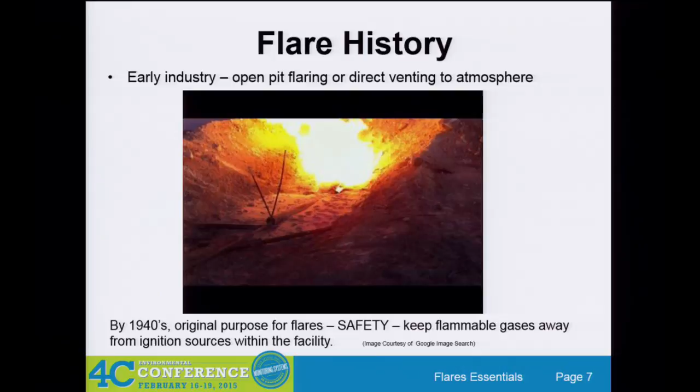These flares, while not so common in the U.S., are around the world. It's still in use today, especially on the upstream side in some other countries, this is still a practice in use today. But what would you say if you saw that? That looks like it's around today. This is a picture of a flare, a ground flare, pit flare that is in service today in the United States. So they're a little more complicated than just that pipe run into the hole, but it's something that is still here. They're very rare, but they are still around.

So the biggest thing when flares came about is they were installed as safety devices. That was their primary purpose. You have to always understand that about flares, their primary purpose is safety. And we can't say that enough, because when people start asking how much can you control this flare, you have to understand that it needs to operate over a wide window of flow conditions and compositions. It has a very unique purpose.

But the issues started changing because in the beginning, it was better to flare than to just release potentially toxic hydrocarbons out into the atmosphere unburned, so it was better to combust them. But then the world changed and everybody started routing everything to their flares because that's great, we have this gas that we don't know what to do with, let's put it to the flare and then it's controlled, so we're doing the right thing. But it's this low flow case that seems to have really started to cause a lot of the problems.

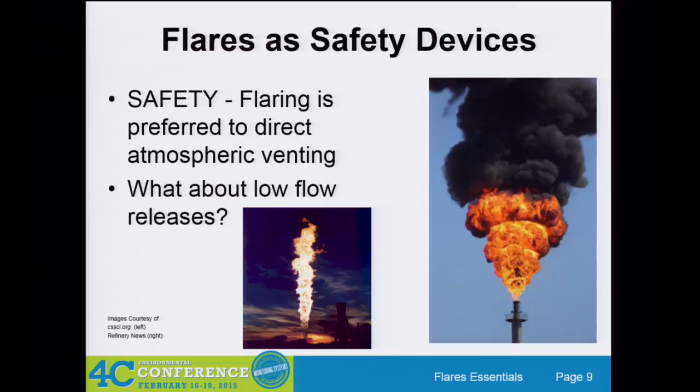So when you're thinking about flaring, the biggest thing is the flare is designed because, say you lose power at the facility, all of a sudden all your relief valves blow, boom. You've got to get rid of a huge volume at a rapid pace, because you have an upset condition, usually a high pressure, high temperature situation. You need to get that material out of the vessel, because otherwise it's going to cause problems with the vessel and potentially explosions, equipment damage.

Usually it's cheaper to vent the vessel and burn off all the contents than to cause damage to the vessel. So you definitely need a way to get that material out of there.

And getting back to the safety device, you also want to bring that combustion away from people and equipment. You always want to do this. And also the nice thing about having a nice tall flare, it also aids in dispersion, so you get an added benefit from that.

A lot of people thought about flaring, and the allegation is that everybody's flaring a ton of material. I don't see that - there are some cases where people are maybe flaring more gas than they could. But a lot of times when the flare's got a big flame on top of it every single day, it doesn't take long before everybody at the plant starts saying, that's a lot of lost energy. What is that material? Is that lost raw material, lost product? Everybody starts equating that flame with dollar signs.

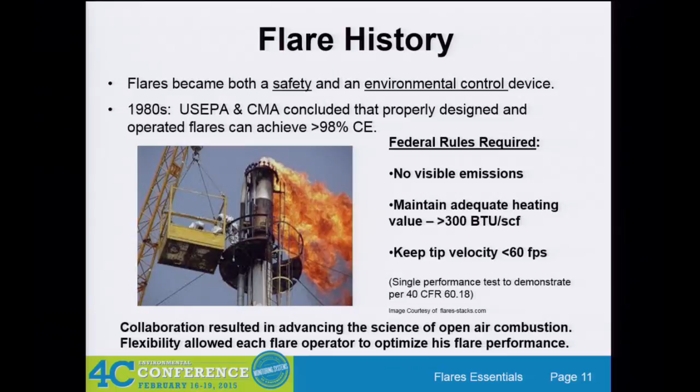You know, people say, well, they got the thermal suits on, and we're all like, well, have you seen the Jiffy Pop popcorn? You know, the old little aluminum things, and the wind shifts, and they're having a very bad day. So yeah, I don't even know where we got this. We got it from flarestacks.com, but I don't even know that facilities would do this today. The safety guys would have a nightmare.

So back, we'll show you some of the different flare studies, and we're not going to talk about all these flare studies - that would take a whole day, and we're not going to go into that level of detail. But there's just a few I want to point out a couple of different things about these studies to kind of show you where the knowledge came from.

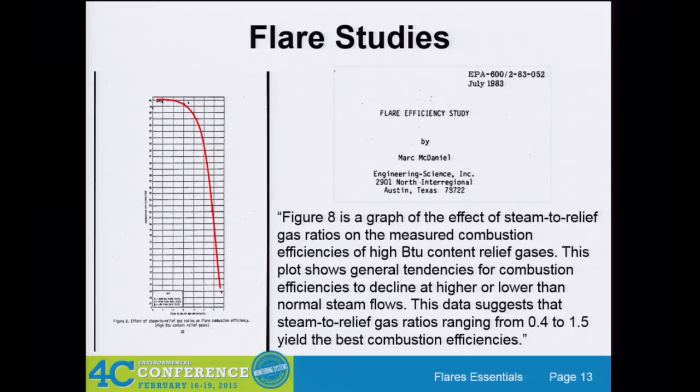They came up with these numbers in the report that basically said data suggests steam to gas ratios from 0.4 to 1.5 - that's way back here in this zone. They did have some data points right here, and that equates to about 3 to 1. You'll hear that number again. A lot of the numbers from EPA are that 3 to 1 ratio, based off I think 2 data points - that's where that came from. So you just got to understand that yes, there are studies, but there isn't a ton of information out there.

So they did all these studies, and they decided yes, you can use the flare as a control device. They talk a lot about flame stability, and if you have a good stable flame, you're going to get good combustion. One of the things though is they don't define flame stability anywhere, other than the fact that you have a flame - so if you have a flame, it's a stable flame, because obviously if you don't have a flame, you're not getting good combustion.

But they like to use this word a lot, because they'll say things like you want to have a nice, upright, luminous flame, maybe with a little bit of black marbling in there. That's where they're using all these words to kind of describe a well-operated flare. But they're all nice subjective words that are all interpretation. So it's an interesting place.

They definitely say that this stable flame is dependent on the flare design and the gas composition. So they understood that it is going to depend on what you're sending to your flare as to how good of combustion you can get. Again, concepts we already talked about - the gas exit velocity is important, heating value - and so then it's again, flame stability. I can't talk this morning.

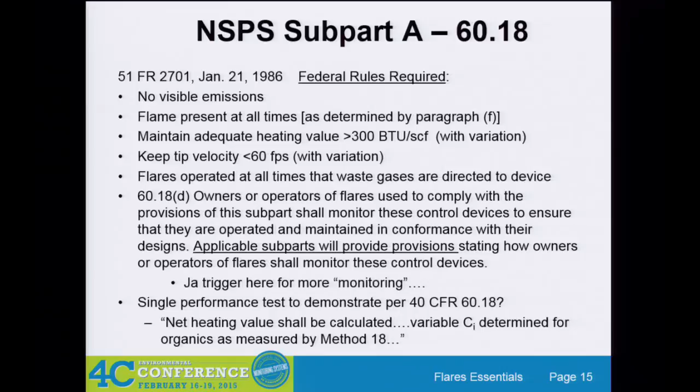Fast forward a few years to the 90s, and this is kind of the moment all permit engineers were waiting for, because this is what we really needed. One thing it gave us was the number — what number can I use in my permit application, in my emissions calcs, to claim a combustion efficiency for the flare? And we got it: 98% combustion efficiency.

One interesting thing was they start off the flare section saying noise and heat are the most apparent undesirable effects of a flare. Did anybody see noise or heat in 60.18? I didn't see it. So why is noise and heat the worst thing coming out of a flare, but we don't care about it in the rule?

Another thing it goes on to say is emissions from a flare include soot. Well, I thought we were supposed to be smokeless - it said no visible emissions. Well, soot's going to give you visible emissions.

So already the AP 42 section says that the flare is going to likely give you visible emissions. I mean, it's just the unburned hydrocarbon - there's a lot of different chemistries going on up there, but it's just formation of soot particles. It tells you also that you will have unburned hydrocarbons, so yes, you can't go all the way to 100%.

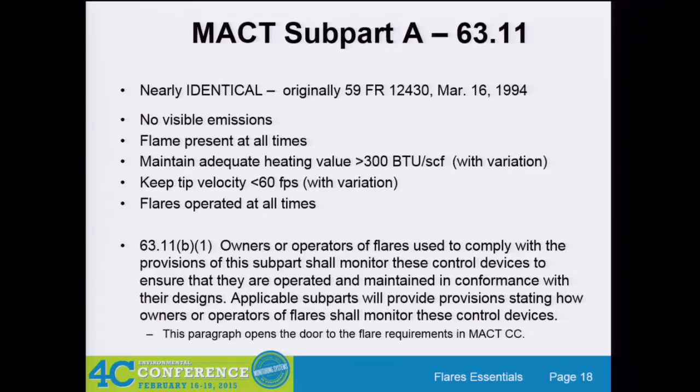Okay, so that was the NSPS side. We also have a similar one on the MACT side, Part 63.11. It is almost word for word identical to 60.18, so we're not going to spend a lot of time on it. It has all the same parameters - no visible emission, flame present, all that good stuff. It also says other applicable subparts can add additional requirements, and that's what we're seeing coming out with MACT CC - that's where all these new requirements are going to come out.

Okay, so we're talking about smoke, and everybody hated smoke. We wanted, mainly for PM emissions, don't want to have a smoking flare because you can put out a lot of PM emissions. That doesn't necessarily mean that flare isn't getting good destruction efficiency, but it is smoking and it's undesirable.

So there are methods - method 9, method 22 - to determine how much smoke is coming off your flare. Method 9 is more rigorous, you have to become certified. Method 22 is where you just become trained and knowledgeable in looking at smoke.

So they come back and said, okay, we got these charts, the Ringelmann scales, to say how much smoke. So you got guys out there with a piece of paper, looking at the smoke, trying to figure out how much smoke they're putting out there.

But then everybody says, okay, what's the solution? Steam. Steam is your solution. It helps get rid of that smoke. So everybody's going to say, that's where we get into that turbulence. And this is actually a pretty big flare.

Inside here, you see these tubes. Those are called lower steam injection. Actually, the air inlets are down here at the base of the tip. They come in, mix with steam, go up, induce air, and add that steam and air into the center of the combustion zone. Generally, you only have that on the much bigger flares.

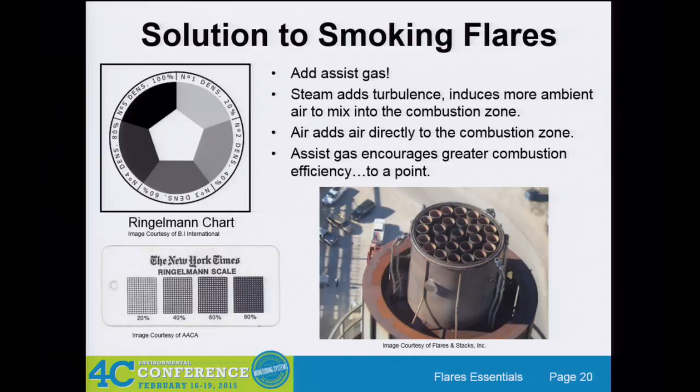But then, instead of steam, they also found you can just add air. Works a little different, but the same principle. We like to say it increases combustion efficiency because you're getting rid of the smoke, going all the way to carbon dioxide and water. But there's a point to that assist - you can add too much, and now you're actually decreasing the combustion efficiency.

So let's get into some more recent stuff, just to say we're not always thinking about studies back in the 80s. We're going to talk about the TCEQ air quality study in the HRVOC area, the Houston-Galveston area - it's a non-attainment area for ozone, with some special rules there. We'll also talk a little about California, because of that whole thing - how goes California, so goes the rest of the country, at least for environmental stuff. That's somewhat true, though there have been some breaks from what's happening in California with the rest of the country.

We're going to talk about this case in Addyston, Ohio - this was the landmark flaring case that basically showed EPA there was a problem, and it was a widespread problem. We'll talk in detail about that. And then, as recent as 2011, TCEQ again did a test at the John Zink facility in Tulsa, Oklahoma, where they redid a lot of this testing on actual industrial flares - not 200 feet up in the air, just the tips mounted at ground level - to understand how much assist you're putting to your flare and how that affects combustion.

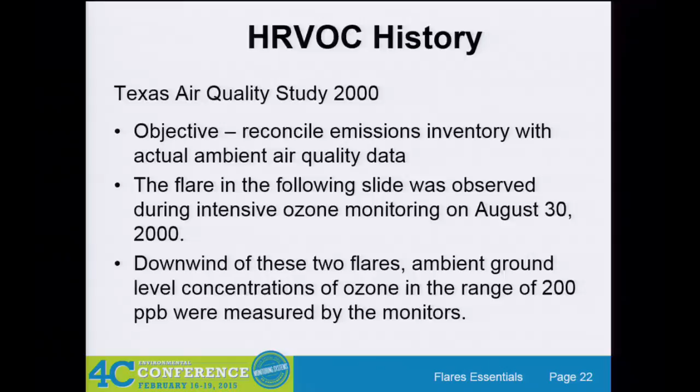So they went back and ran their models, and came to a conclusion: based on the data they were given from this event, where you're going to have emissions coming from the flare, they could not get the model to match the emissions unless they decreased the combustion efficiency from 98 to 90%. This was where they were saying, wow, this could really be a problem.

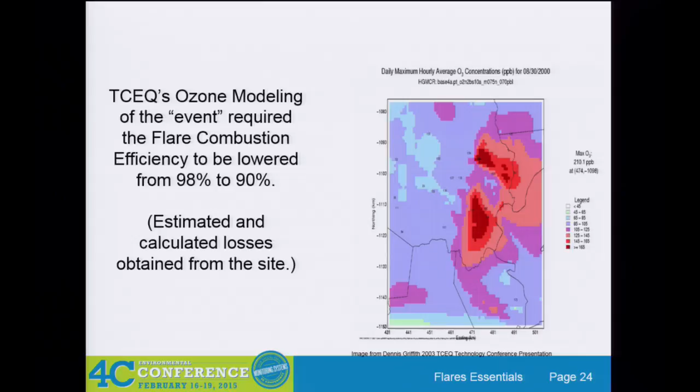Russ Nettles from the TCEQ is here at the conference, and he works with the emissions inventory. He's a nice guy. They did a lot of work based off of this trying to understand it, and he'll talk about flares that are over-assisted and how they can sometimes double the amount of emissions going into an area if they're not properly operated.

So out of that, we decided, well, this is an issue, we need to do something because they need to come into compliance with the NAAQS. So we get the HR VOC rules, the highly reactive VOC rules. They said they wanted to really focus on certain VOCs that are more likely to create ozone at ground level. One of the things they did was cause everybody to install flow meters on their headers and install composition analyzers to understand what's in the vent gas.

So this is really some of the reasons why today, when the new rules come out and everybody needs to put flow meters and analyzers on their flare, we have ones to choose from, because they were forced to do it back in 2003. Because flare service is a lot different from a lot of other services, so you've got some hurdles to get through for those systems. This was really how they went through that learning process with the instrumentation.

Okay, California. They kind of went their own way because they really wanted to get rid of flaring entirely. They want to remove flaring totally, that's their desire. So there's been a huge push, and if you don't know about California, they have their own air quality management districts, which regulate that air shed separately. So you have some of the three big ones: Bay Area, South Coast, and San Joaquin Valley.

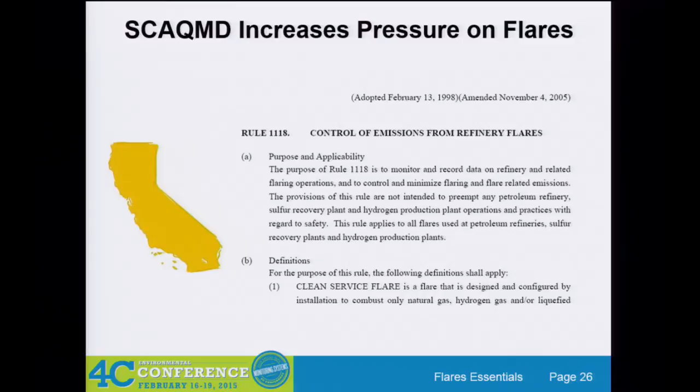And how have the refiners in California dealt with this? Every single one of them have installed flare gas recovery. So now they all have these big compressors that are sucking back the gas and keeping it from their flare. So that regulation basically drove them all down a path. Just be aware that certain states have more stringent requirements on flares, but not all of them.

Okay, Lanxess in Addyston, Ohio. This was the aha moment for the EPA, up in Region 5. There were two guys, Brian Dickens and Pat Foley with the EPA, who were investigating this. Pat Foley is still highly involved with flares and flare enforcement. If you get into a consent decree discussion, Pat Foley will be in the room. Just know that he's been there from the beginning. So the deal was, you have this facility in the town.

They were a source of butadiene, acrylonitriles. And what did they have across the street from the facility? An elementary school. Maybe not the best place. You know, probably one of those things where the company maybe even gave them the land to put the school on, one of those deals. But what was sitting on top of the school? An air quality monitor. And all of a sudden, what does the data start showing? We're starting to have a lot of these high butadiene episodes. So, of course, we're going to be highly concerned about this.

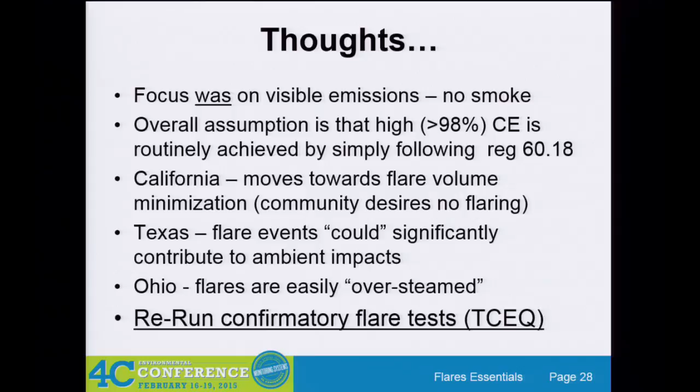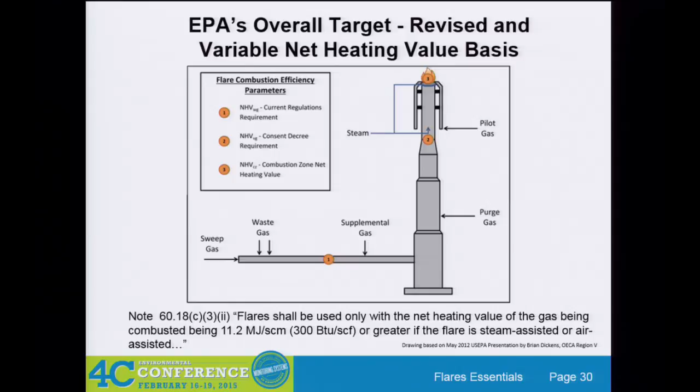Okay, so how many people in the room got one of these? I'd just like to see if anybody got one. The enforcement alert came out. Basically, they were saying that people weren't - basically, the EPA was kind of upset that more refineries did not take up subpart NSPS-J applicability.

NSPS-J came out and flares were covered under that as a fuel combustion device, had SO2 limits, but through a lot of hand waving, people said we didn't trigger it. So the EPA said, okay, well, we still think that SO2 emissions are too high, so they decided they were going to get a new rule, and that is where NSPS-JA came out, which is going to pull in probably every refinery flare in short order, if not already.

Then again, we got another enforcement alert, this time on oversteaming. This letter went out to every refinery, and I think we said it was like over 100 chemical facilities. We tried to FOIA the EPA to get that list of people who that alert went to, just because we're consultants, we like to have clients, so we thought these are people that might be concerned about their flare. But the EPA said no, we cannot give you that list, and they said it's because it's part of ongoing enforcement.

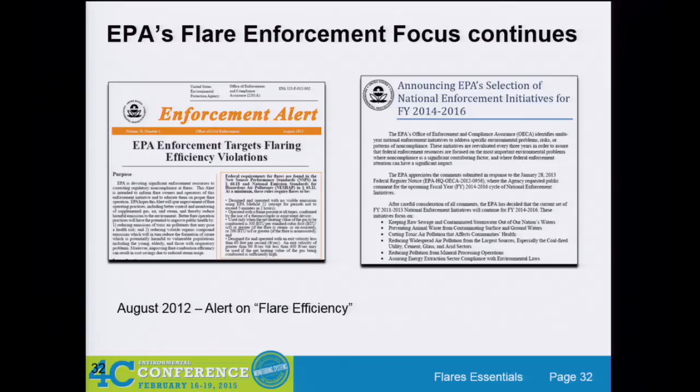And then we got back and they announced that one of the EPA's national initiatives right now, we're right in the middle of this time frame, is flaring. So just so you know, right now there is a lot of focus on flaring, and maybe not a lot of fun, but we like to have that here in the class. So it is something that is very interesting.

In case you're not aware, when EPA wants to write a new rule or make amendments to a rule, they need data to do that rule writing. So what they do, and they did this back for the refining sector in 2011, is send out what's called an information collection request - a whole bunch of questions that every refiner had to respond to. Took a lot of effort, a lot of time, and they got all this data.

That was in 2011 - what did we get in 2014? We got the proposed changes to MACT CC. So we see that they got data, they're revising the rule. If you're in the ethylene industry, the ethylene ICR just got over, so they've now collected up a whole bunch of information on the ethylene industry. We're expecting that, the latest we heard was maybe June. June was for MACT. We're anticipating that in the next year or so we're probably going to see proposed changes to the ethylene MACT, so we're expecting there to be flare changes in the ethylene MACT.

So it's coming. But we looked at the data - this is all data we FOIA'd, got all this data.

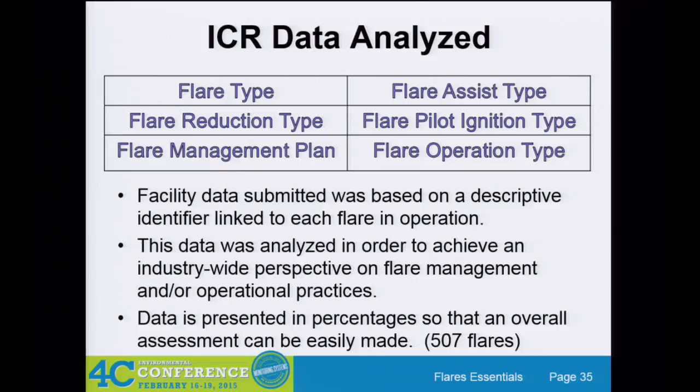So for assist type, we found out that a huge quantity of flares are steam assisted. Air assisted is the next biggest group. A lot of some unassisted flares - I mean, those happen. And then again, other, which we were wondering maybe that was somebody saying it's pressure assisted. Generally, pressure-assisted flares are kind of a hot topic right now.

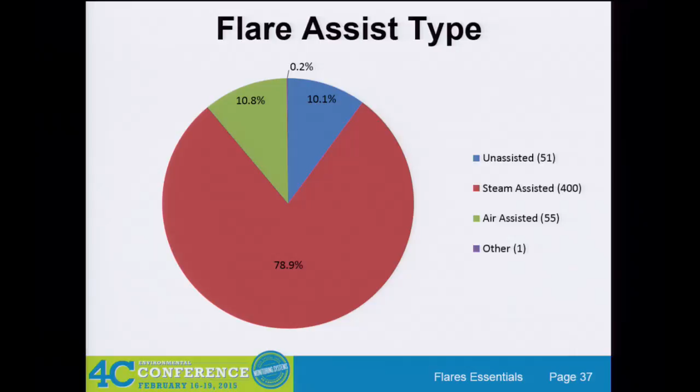What we've seen so far is that the EPA is sticking to this 3-tiered classification system. So a pressure-assisted flare, while it gets no steam or air added to it, they call that a pressure-assisted, unassisted flare - so they're still calling it an unassisted flare.

How do you keep your pilots lit? Remember, you've got to have those pilots at all times for NSPS, or 60.18.

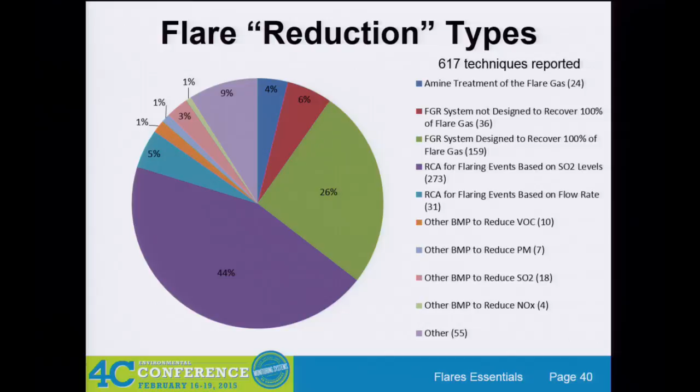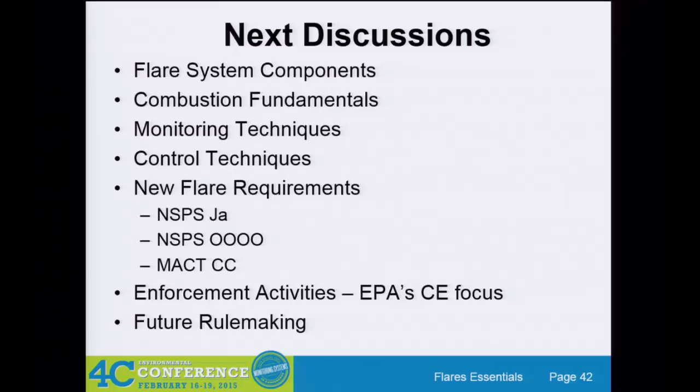So that was my maybe not-so-brief introduction to the world of flaring. Next, we're going to talk about components, and then combustion—how you monitor that combustion, how you try to control it—and then we'll get into some of the rules, finishing up today with enforcement and our path forward. So Rashab's going to take over now. We have half an hour till the first break, so we can probably get through it.

Nope. They didn't put these in order. Don't put it too high.

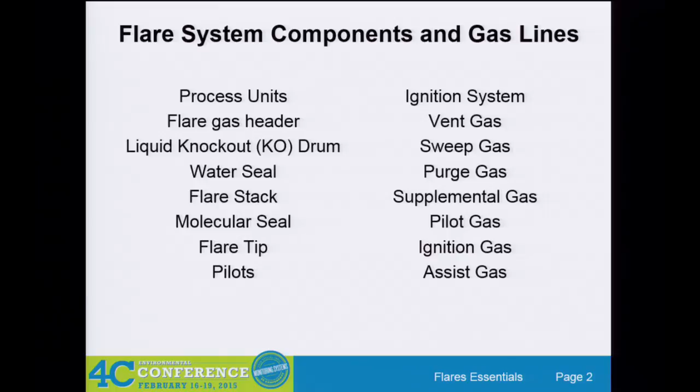Okay, so we'll start off with the process units. That's essentially where the vent gas originates. Process units work in different ways, and they're usually at a steady state, but occasionally they can overpressure, or you can have an upset, a power outage that leads to high pressure, high temperatures, and the flare basically serves as a device that can help control those excess flows coming from the process units. So instead of venting those toxic hydrocarbons to the atmosphere, you want to send it to a flare where you can combust it and make it safer to release.

There are many different types of contributions that go to a flare. You have your control valves, pressure safety valves, manual bypasses, manual valves, restriction orifices. So there are many different ways in which you can be tied into your flare. And that's actually one of the things the regulations require, is for you to make a list of all your connections to the flare, which we'll get into later.

For sizing, you have to anticipate how bad a power outage or emergency event can get, and how much your flare can handle. So that's something to take into consideration when you're sizing for your flow rates.

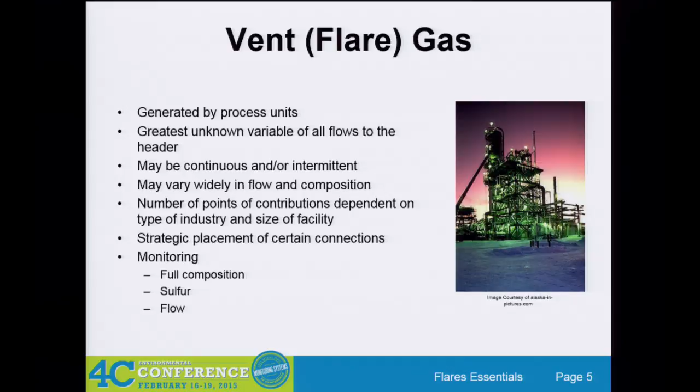If you want to be able to control your flare the way you want it to work right, you have to also monitor what's going to your flare, and that's when you get into composition monitoring, sulfur monitoring, and just the volumetric flow or mass flow going to your flare. So we'll get into monitoring later on too.

All right, so the flare gas header, it's usually that big pipe in the refinery that you see running across. It essentially serves the purpose of collecting all that vent gas and directing it to the flare. They're hard pipe connections, and one of the most important things you'll hear all throughout the day is...

...the potential for oxygen infiltration into your flare header. That's something you want to avoid, because if what's going through your flare header is a combustible mixture, and if you add oxygen, and if there's a spark by any chance, it could go kaboom. So that's something we want to avoid. There are many different components in place in a flare system to avoid that very situation. So you want to make sure there's no oxygen coming into your flare header, there's positive flow always pushing out. So the flare header essentially serves the purpose of taking your vent gas to the flare stack and to the flare tip.

Okay, so now we'll get into the liquid knockout drum. These are usually the large drums just before the flare stack. Again, the main function for a liquid knockout drum is to knock out the liquids in your vent gas. So when your vent gas is going to the flare, it's going to have some liquids in it, and you want to make sure the flare tip itself is not designed to combust liquids, so you want to knock out those liquids before they get to the flare tip. That's essentially the purpose of the knockout drum.

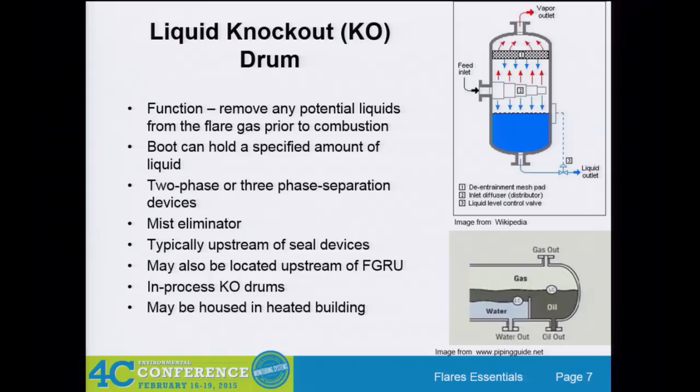So what happens when liquid is not knocked out of your flare gas?

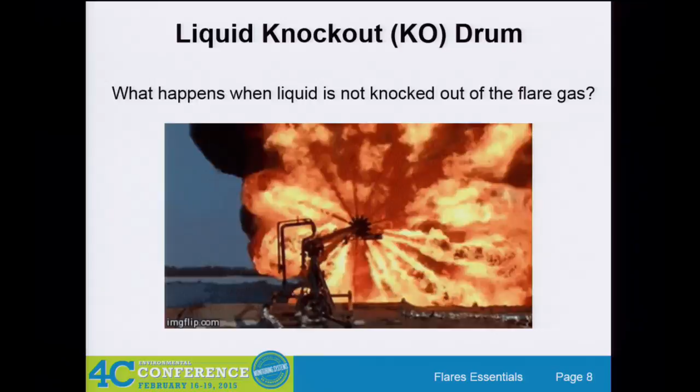Okay, continuing downstream from the knockout drum, we now reach the water seal, or liquid seal. Not all flares have a liquid seal, but essentially the purpose of a liquid seal is to serve a dual function. One of them is to prevent flashback.

As I said earlier, oxygen in your flare header system is no good. Similarly, oxygen in your flare stack, you don't want that to happen. But if it were to happen and you had a flame in your flare stack, the liquid seal would provide a barrier for that flame, preventing it from entering your flare header. So that's one function of the liquid seal. The other function is it acts as a pressure barrier.

That liquid level you have there—the height of the liquid essentially gives you a pressure barrier. And what you can do with that pressure barrier is, if you have an interconnected flare system, preferentially route your flare gas from one flare to another. Or if you have a flare gas recovery system, or flare gas recovery compressors, that pressure barrier allows you to maximize the amount of vent gas you're recovering in the compressors.

So usually we find liquid seals are in a flare system that has flare gas recovery. But if you don't have flare gas recovery and you have the liquid seal, you're just constantly going to bubble through that liquid, or usually water, and send your gas up to the flare.

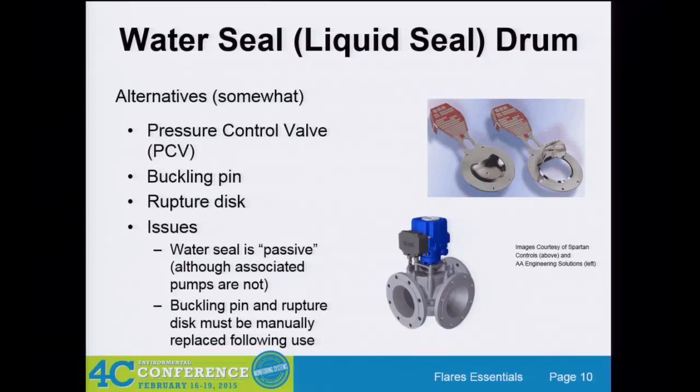For certain facilities that have emergency flares and don't have a liquid seal, say they have a pressure control valve or a rupture disc instead, we have put in alternative monitoring plans to the EPA. We've applied for them, and some have been approved. So these are some of the alternative options to a liquid seal.

Then we finally get to the flare stack. There are different kinds of flares. As Herman showed from the ICR data, the most common type are your elevated flares. You also have portable flares that you can bring on a temporary basis, and then ground flares that are usually pressure assisted, which we call tulip fields, but we'll get into that too.

Moving up the flare stack, one of the cool devices you can find on your way up is a velocity seal or a buoyancy seal. Essentially, the function of the buoyancy seal or the velocity seal is to prevent ambient air from infiltrating down into your flare stack.

For a velocity seal, you're working off the principle that the air is going to come back down along the sides of the wall of the flare stack. So what the velocity seal does is ensure that the purge gas or vent gas coming through keeps that ambient air out of the flare stack, with a constant upward flow. The other function it serves is as a purge reduction device, so installing a velocity seal can end up in a lot of cost savings for your purge gas.

With the buoyancy seal, if you have a purge gas coming into your flare that's lighter than air, it accumulates up there, acting as a barrier against ambient air coming back in. If your purge gas is heavier than air, it'll sit at the bottom, again preventing ambient air or oxygen from going back into your flare stack.

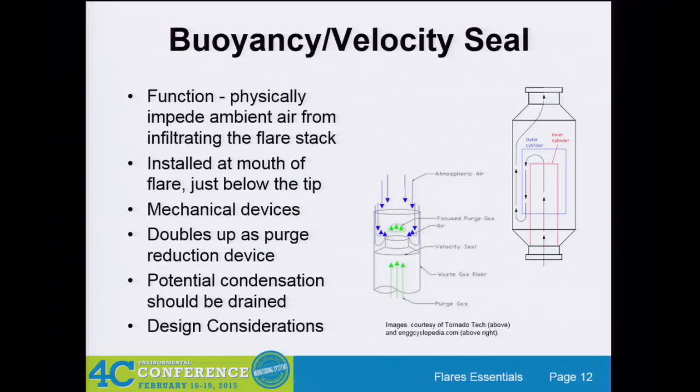Then we get to the flare tip, which is basically where the magic happens. The flare tip serves the function of mixing the flare gas, creating that combustion zone, mixing the air and the flare gas, and creating turbulence to ensure complete and good combustion.

When you're designing your flare tip, it has to be able to handle the base load or emergency case. Other considerations are the metallurgy for the flare tip, since it gets hot up there with the flame and combustion. It's important to consider the metallurgy to maximize your flare tip life and not burn it off. That's one of the functions of the assist gas, and we'll get to that too.

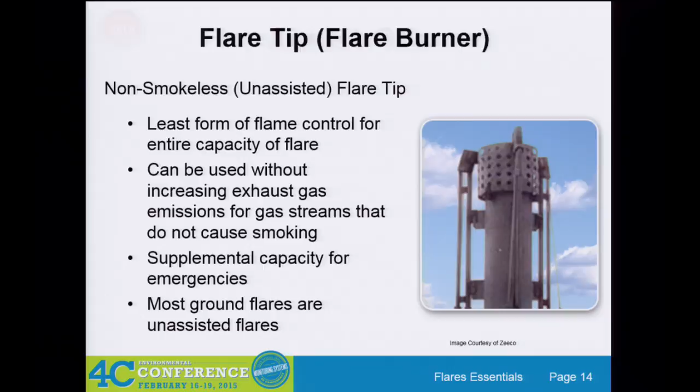So assist gas, Herman touched upon this in the last module. The main purpose of the assist gas is it actually has two functions. One is to help with the efficient functioning of your flare, ensuring good combustion, ensuring mixing happens at the flare tip, and creating a vortex to bring atmospheric air into the combustion zone to help with combustion. The other function is cooling of the flare tip, extending the life of your tip. Whether you use steam or air, most tips come with a recommended minimum amount of steam, considering how you can keep that flare tip lasting for a long time.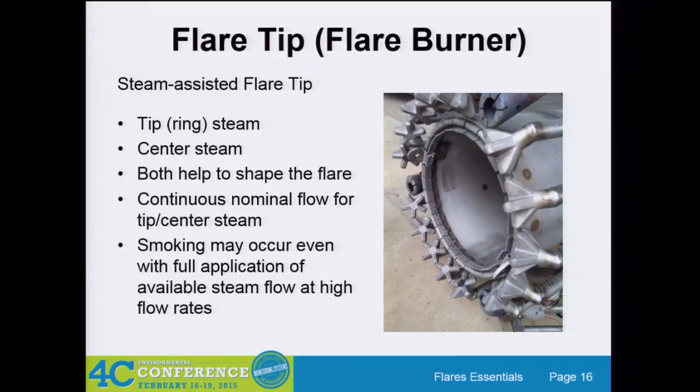And speaking of air-assisted flares, basically what you're doing is you're replacing your steam with air, at facilities that maybe don't have the steam capacity needed for the flare. They use air, or if the temperatures fall drastically and you have the potential of the steam condensing, you can then use an air-assisted flare.

The air for an air-assisted flare is usually provided by the blowers at the base of the flare. The important thing to note is that your vent gas comes in through this pipe and through the flare stack, and your air goes in around the vent gas pipes, but they never actually come in contact until the flare tip. Any guesses for why that might be? Exactly. Continuing with the theme of oxygen in the flare stack, oxygen in the flare header is not a good thing, so you keep those separate, and combustion takes place at the tip.

What's the pressure of that air? Well, that kind of depends on your blower settings. We've seen at facilities you have low settings or high settings.

Preferentially, you would like to have a variable fan drive, which you can adjust based on the flow meter readings that you're getting. So if you have a high flow, you can then adjust your air to vent gas ratio.

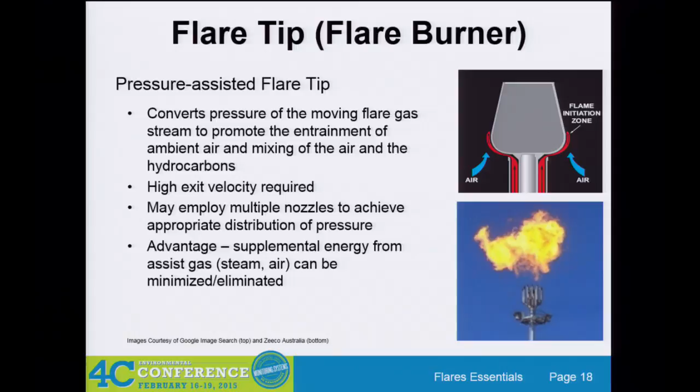So we've discussed the flare tip, moving on to the pilots. The pilots are important for creating that flame in the combustion zone. You want to be able to always reliably ignite your flare gas, and that's essentially what the pilots do. An alternative is you can direct your ignition of flare gas in the header or slipstream.

This is a pretty cool image of the pilots up close. You want to ensure that your pilot always has a constant flow of gas, and usually you'd like to have a gas going to your pilot that has a consistent BTU value, which is why most facilities choose to use purchased natural gas that burns clean, and is usually what is used at the tip of a pilot.

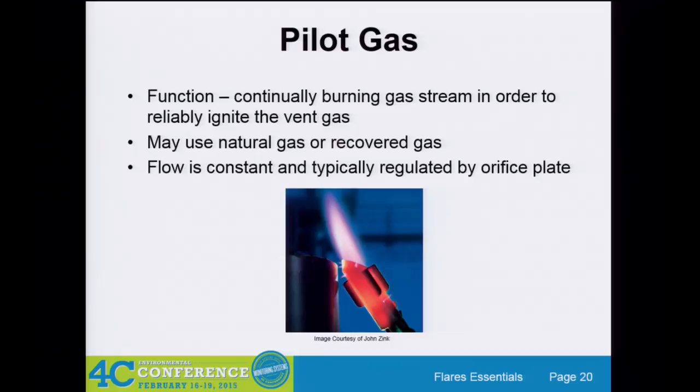And then we get into the ignition system and what actually lights the pilot. There are different types of ignition systems. The ones we most often see are your spark ignition at the pilot tip, or the high energy igniters, and they usually spark up when the thermocouples detect a low temperature.

And then you also have the flame front generator, the compressed air flame front generator, which is at the base, at grade level. What happens there is a combustible mixture is ignited down at the base, and that flame front travels from the bottom up to the flare stack, up to the pilot, and ignites the pilot. So those are the most common ones we see.

We also have seen certain flare systems that have both, one as backup, so that's not uncommon either. Then moving on to the CCTV in your control room, a lot of control rooms have cameras on the flare tip.

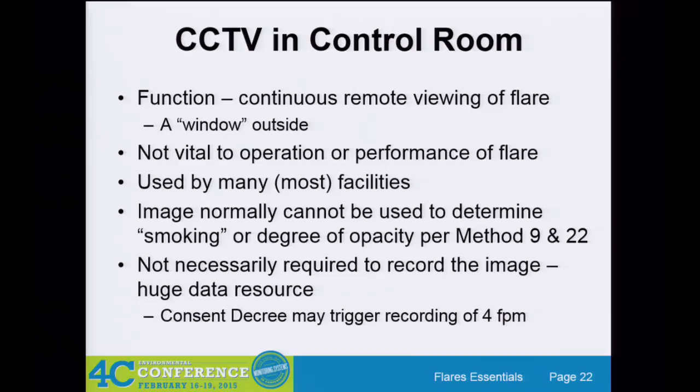You're not allowed to use your CCTV camera for your Method 9 and 22. However, it does allow operators to have a way of viewing what's going on at the flare tip by being inside the control room. It's not vital to flare performance, but it's good to have that continuous monitoring, just keeping an eye on how things are going up at the tip.

Then we move on to gas lines, the sweep and purge gas. Main function of the sweep and purge gas is to keep oxygen out, and to keep a positive pressure in the flare header, ensuring there's always constant flow going to the flare stack instead of allowing any oxygen into the flare stack. We noticed that at facilities people interchange the use of sweep and purge gas, but there is a difference. Does anyone in the room know what the difference between sweep and purge gas is?

So essentially the difference is: sweep gas is added upstream. If you have a liquid seal or water seal, the sweep gas as defined by the rules is what's added upstream of the liquid seal, and your purge gas is added on top of your liquid seal, ensuring positive flow through your stack. So the difference between the two terms is just about where that addition takes place. If you don't have a liquid seal, then your sweep gas serves the purpose of your purge gas.

For the sweep gas and purge gas, you could use natural gas or recovered fuel gas. Some people use steam, but the disadvantage with steam is always the potential for condensation. Again, we've spoken about the location and the function.

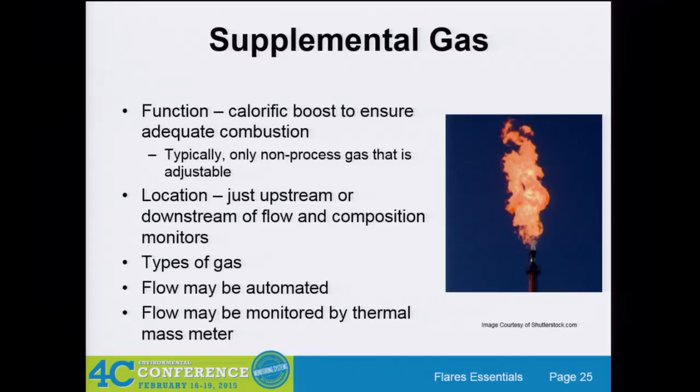You can monitor that supplemental gas, or you can set a minimum amount of supplemental gas going up to the flare with an orifice. So that basically takes us through all the components in a flare system. Next, we'll be talking about combustion calculations. Does anyone have any questions about the components? No? All right.

All right, I guess we'll get moving again, just to attempt to stay on time. We're going to enter into a slightly less exciting module, but it's important, so bear with us, because I know as soon as I start showing equations, half the people in the room are just going to get on their phones. So it's understandable, but it'll help us with understanding. So we'll keep it brief. You won't actually have to calculate anything today, but we'll just talk about things.

We'd like to start off this talk with the thought process for flares and the level of regulation there's been, and then the allegation. Basically, it's this concept of operating your flare with good air pollution control practice. So even though there isn't a rule that tells you exactly how to operate your flare, you should be operating in a way that is the best you can operate it.

The other allegation is that it's common knowledge that how much steam or air you add to your flare impacts combustion efficiency. We've already shown today some of the studies from the 80s. They did more, they've been continuing to do studies, and all the studies have been saying the same thing: put too much assist gas, steam or air into your flare, and you're going to have poor combustion. So that's where you may not have violated 60.18, but the EPA is still going to say that you are in violation because you're not operating your flare correctly.

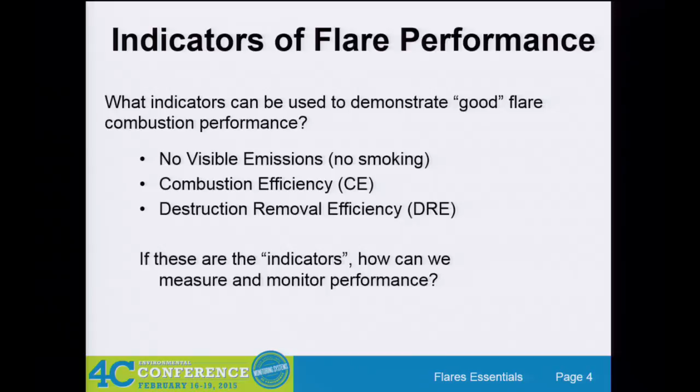So, smoke. You've got the 5 minutes in any 2-hour period. And smoke comes from a wide variety of things. The most basic is just the classic stoichiometry: hydrocarbon plus oxygen goes to CO2 and water. Well, if you don't have enough oxygen, it's going to get short-circuited, and suddenly you're going to have unburned hydrocarbons.

One of the things that happens a lot is, it's a hot environment, so you're going to have some cracking of the molecules. And cracked molecules, what do they like to do? They like to reform with other cracked molecules, forming larger particles that then form soot. So that's where you get a lot of your smoke formation.

There's a couple of rules of thumb: the larger the molecules are that you're sending to the flare, the more likely they are to smoke. The more complicated the molecules are that you're sending to the flare, the more likely they are to smoke. So everything tends to follow that general trend.

So once you're beyond smoke, which even smoke detection is a new science, we hear people talk about a detector that they say can detect the presence of smoke and adjust the steam rate for that smoke. We haven't seen that technology work at facilities yet. So if somebody can get it to work, that'd be awesome to see.

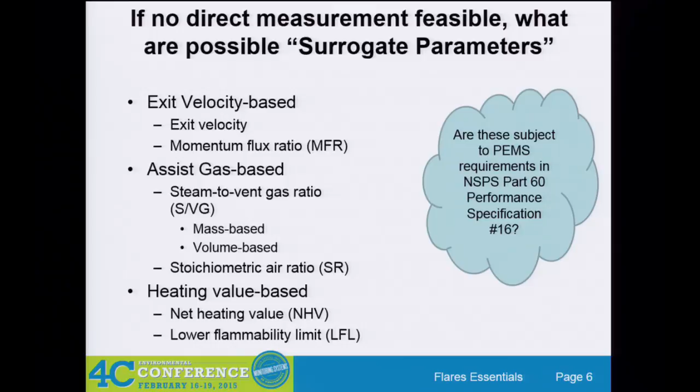So we have a lot of these surrogate parameters that we're going to use to characterize good combustion. We've got the exit velocity, we have how much assist gas you're adding, and then it gets into the concept. Then we move from that concept into this net heating value based in the combustion zone.

So we have the tip velocity requirements: less than 60 feet per second, unless you know the heat content of your gases, then you're allowed to go up to 400 feet per second, depending on a calculation. One of the big issues with the tests used to determine those numbers is that they were done on some of the smaller flare tips, so there's some discussion as to whether the test is really scalable.

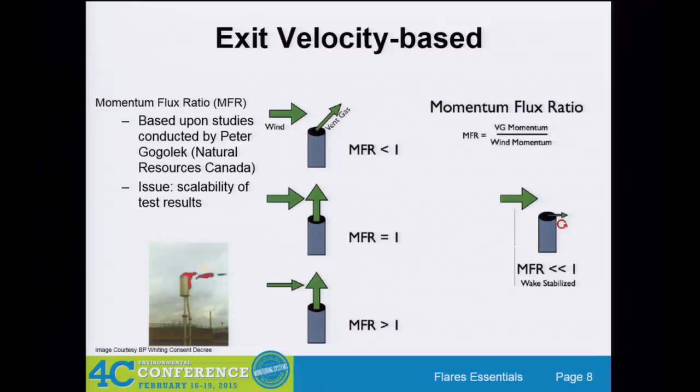They want that flame to stay attached to the tip of the flare. They're very concerned - they're even still talking about it in MACT CC - about liftoff, because there's a high chance of basically snuffing the flame. So they're very concerned about this.

So then we get to combustion efficiency. This was the metric we talked about already - this is complete combustion, going all the way from hydrocarbon to CO2 and water. People generally like this, it's complete combustion, and people understand it.

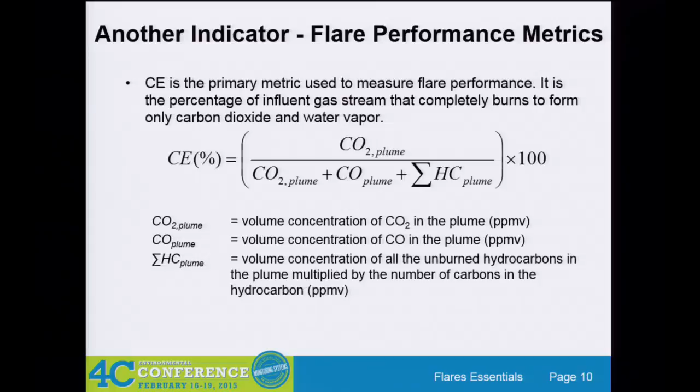That is contrasted with destruction removal efficiency. This one deals with specific constituents - you don't care what the constituent turned into, you just care that it's not there anymore. So if you have some amount of 1,3-butadiene in your flare, you just care how much 1,3-butadiene made it through the combustion zone. You don't care if it cracked or reformed into some other hydrocarbon, you just care that it's not 1,3-butadiene anymore. That's kind of how the terms differ.

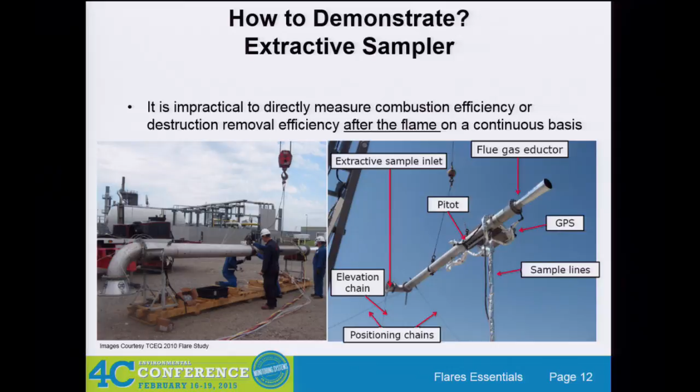But who wants to performance test their flare like that? Remember the $2 million price tag. So we definitely don't want to be doing this, and we'd rather go to the passive techniques.

One of the things that gave some credence to the TCEQ flare test was before they even did the test, they sent out a survey to industry asking how big is your flare. They didn't want to be accused of saying you didn't test on a relevant flare size. So they asked everybody what's your flare tip size, and then they picked a flare tip that was about the average of what people had out there. So this is a typical size flare.

They also asked questions like what is your normal operating condition? We want to know not what's going on at the emergency case, we want to know what's normally going there, because just because you have an emergency that lasts 4 hours once a year, that's not as interesting as what's happening the rest of the time. So they found out that most flares are operating at a high rate of turndown - there's very little vent gas going to your flare at normal conditions.

So they did these tests, and then they varied, like I said earlier, the heat content of the gases, and then they varied the assist rate to determine how that impacted the destruction and removal efficiency.

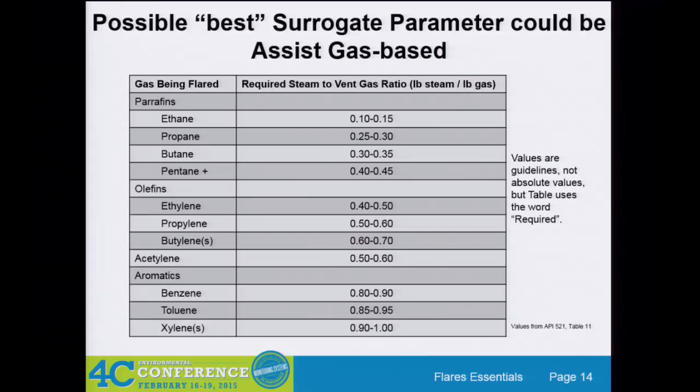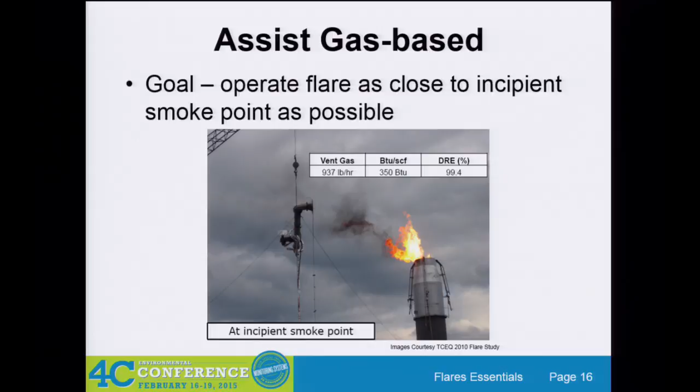For the air assist rate, they did the same thing for air-assisted blowers or flares. One thing they saw was the same trend, that as you add more and more assist gas, you reduce the destruction efficiency. But what they didn't see was that shelf, that kind of you're on the shelf and then you fall off it. They just showed basically a linear decline. But it's basically the principle of a candle. How do you put out a candle? You blow it out. So it's the same thing for an air-assisted flare.

From that study, and it's all available online if you ever have time, if you like studies it's a pretty good one to read, lots of good data in there, they start talking about this concept of net heating value up in the combustion zone. They just bring it up, but then say that was beyond the scope of our study, so we can't say anything about it because we didn't study it. So they introduce the concept as something that might be good to think about, but the study itself doesn't comment on it.

So now we're going to move into, you basically need to be able to measure the heating value and the composition of your flare gases, because not all gases exhibit the same combustion profile. We saw from the different steam to vent gas ratios that depending on your mixture, you're going to need to use a different steam rate. So it's basically moving yourself up the flare stack.

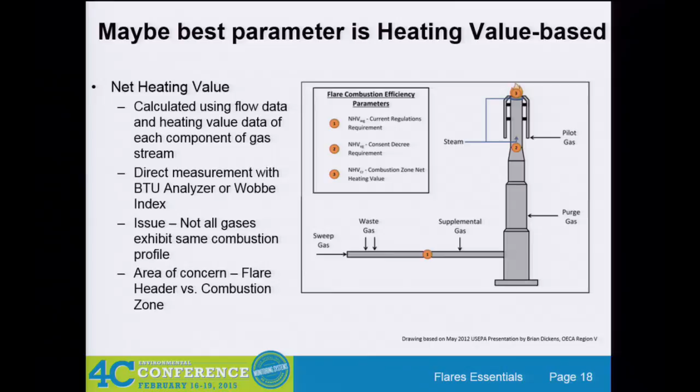Yeah, not yet, but it's in consent decrees, yes. So it's yes, yes. And the equations that we're going to be showing you today, again, I'm not going to ask you to do any math, but these are the equations that come out of the consent decrees. So this is where the math starts.

This progression is going to show you how to calculate the net heating value in the combustion zone. The first thing you need to know is the net heating value of the vent gas, so you need to know the constituents in your vent gas. That's where your composition analyzer comes in, whether it's a GC, mass spec, FTIR, there's a variety of techniques. Then you use known published values of the net heating value for those constituents, getting the sum of the product to get your net heating value of the vent gas.

In an enforcement case, the values for the net heating value, the EPA will provide those to you, and those do not match up with Perry's or some of the other literature. We don't know where they got theirs. They're close, within about 5% of each other, but not the same, which brings up interesting things with your monitoring, because a lot of composition analyzers will give you your BTU content, they'll do this calculation for you, but are they using the right net heating values? So that's another check you have to do beyond just buying equipment.

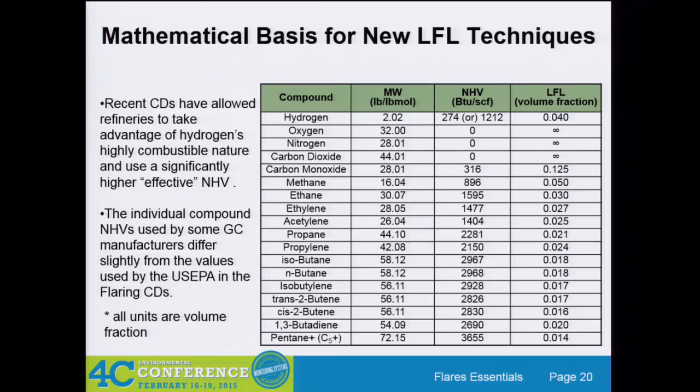It's all—yeah. So a lot of times we'll say, with the calculations, don't do those calculations inside of the instrument. Bring the composition data outside of the instrument and put it into either a DOS or your DCS or something, and have that calculation done external to the device.

You recommend that from a regulatory perspective or an operational one? I recommend it just so you know what's going on in your compliance. If someone were to say to you, show me that you're using the right numbers, instead of trying to go into the device to figure out what values it's using, you have it all external.

And when you get to the data side of this, you're going to be taking all the data you can get and post-processing a lot of it. It's better to have the data because you can use it in all these different ways than to not have it.

So when you think about lower flammability limits, we have this concept of the nose plots. Won't spend too much time, but basically, if you have a mixture of a combustible gas with, say, nitrogen—or in oxygen, sorry—you're going to have a composition range where that mixture is flammable. Below that, it's too rich or too lean. So basically you want to be in this window, in this zone where you're going to have an actual flame present, where the gas mixture is flammable. If your mixture is not flammable, it's pretty hard to have a flame.

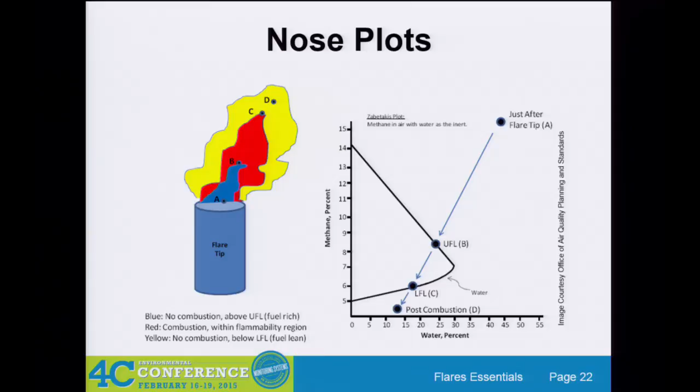It's easy enough to do that analysis when you have a single mixture, but when you start having a lot of different components together, these combustible zones get a little confusing. That's where that equation comes in, with the inverse of the lower flammability limits, using that calculation to determine the flammability of your mixture, which is read from your composition analyzer, collected as the flow and composition vary.

So now we need to go up to the tip. This is where you take the net heating value of the vent gas and multiply it by the lower flammability limit of the vent gas, and then you calculate your limit - what is your benchmark where you need to be above to have a combustible mixture? There are a couple combustion variables provided. You have to take into account the concentration of propylene, and that will give you your limit, what you need to be above to show good combustion.

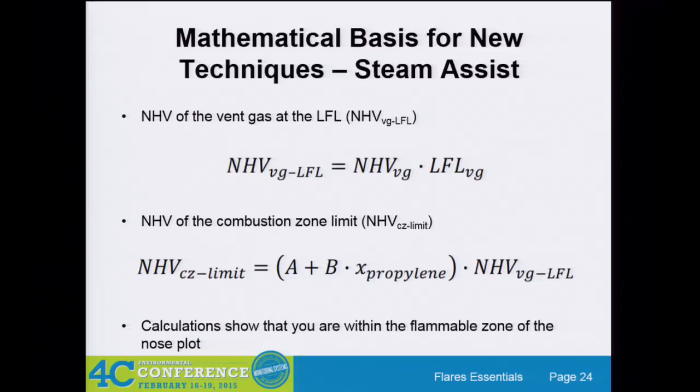Those combustion efficiency multipliers are shown here. Depending on where your minimum steam is, that puts you into one of two cases. Then you're looking at the VOC concentration - remember, methane is not a VOC, so you've got to remember that when picking these multipliers. Then this B multiplier depends on your hydrogen concentration and your propylene concentration.

Everybody asks, why do we care so much about propylene? There was some testing done that basically showed when you're combusting mixtures high in propylene and hydrogen, combustion efficiency falls off quicker than with other mixtures. They came up with a hypothesis, since there hasn't been a lot of study in this area, so it's still people guessing at what's happening. Basically they're saying that when you combust hydrogen in the presence of propylene, it forms some stable intermediate products in combustion, so they don't continue down the combustion path. It kind of short-circuits the combustion early, so you can see your combustion efficiency drop quicker.

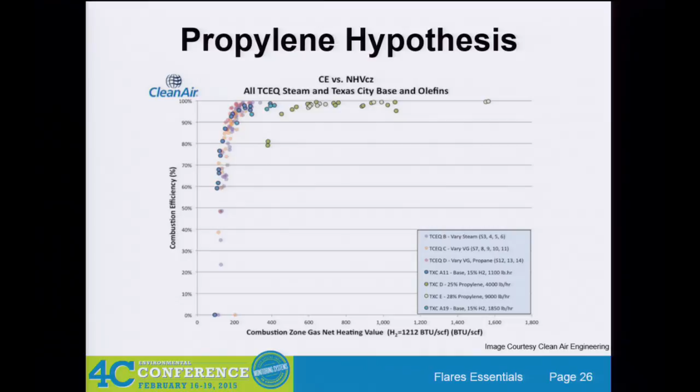Okay, so we figured out what our limit was. Now we need to figure out where we're at - that's your net heating value in the combustion zone. Here you're taking into account the heat coming from your vent gas, the heat coming from your pilot gas, divided by the pilot gas, and this is where your assist comes in. Unless you have a dual assist flare - if you only have a steam assist flare, this term goes away. This is not like the atmospheric oxygen that you need to account for.

If you have just a purely air-assisted flare, the steam number would be zero. But if you have a dual assist flare, you would need to have both of these terms in the denominator. So you can see, if you add more and more steam or more air, you're going to make it harder and harder to meet that combustion zone parameter. From the consent decrees, especially the earlier ones, I think they've started to move away from this, which is a good thing.

What you had to show was you're higher than your combustion zone limit, and you still have to be higher than 300 BTU per scuff in the vent gas. You never get rid of your subpart A requirement. That's always going to be with you. But one thing to think about is this CZ limit was calculated based on the concentration from your analysis, which depends on your technology. It could be every 60 seconds to 10 minutes to 15 minutes. So now you have a moving target of where you need to be. Not only are you trying to control all these parameters, now where you're trying to control to is going to change every time you get a new output from your analyzer.

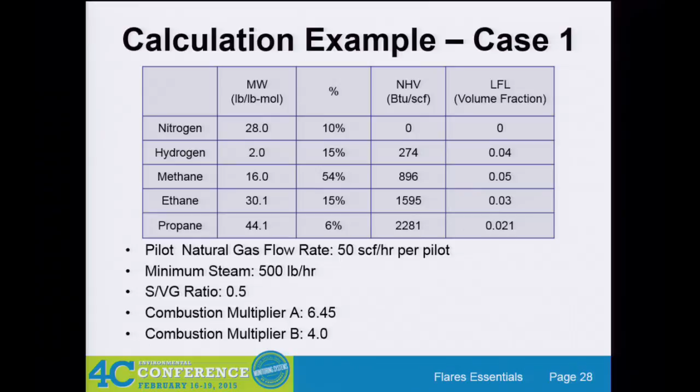Okay, so I just want to illustrate a couple of examples, just to kind of show you, we basically made these up. You got your flow rates, a minimum steam from your steam tip manufacturer. You have a steam to vent gas ratio of about 0.5. You get your multipliers, go through your calculations, get your net heating value, your vent gas at 900. You're doing great. You calculate your LFL, the LFL of the vent gas. Get your combustion multipliers, again because methane and ethane, not VOCs. So you get a net heating value combustion limit of 225, which you can see is lower than the 300. So that's a different limit.

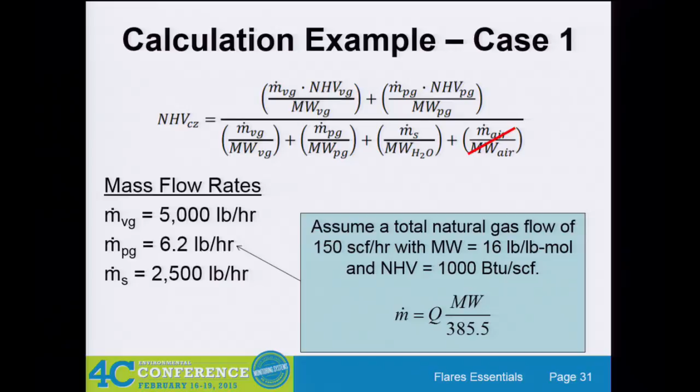And so then taking your flow rates and just no air, you're going to get, using the flow rate of your pilot gas, a net heating value in the combustion zone of 591, with a CZ limit of 225. So you're good. You're above your net heating value of your vent gas, you're above your combustion zone limit. Now we had a pretty good flow rate, not a high steam to vent gas ratio. Remember, it was 0.5 to 1.

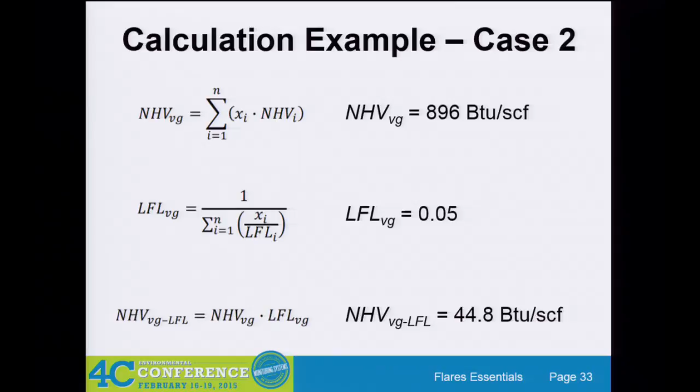So then we look at case 2, which is typical of a lot of flares. We talked about flares that have flare gas recovery - you're only going to have that minimum purge case. So we're going to look at that minimum purge flow rate, which can be very low numbers. That was the whole goal, to get the amount of gas you need to put up your flare as low as possible, to save some dollars on purge gas. Got your other combustion, keeping the minimum steam the same. Go through, still good in the vent gas, 896. Got your LFL. Combustion zone limit, 289. But here you start looking at it, net heating value in combustion zone is 52, where your limit was 289.

And when you look at your steam to vent gas ratio, 24 to 1 - these are numbers that you will see coming from your tip drawings. So if you're looking at that base case, purge only, minimum steam, you could be over-assisting quite a bit.

So, how do you correct for that? Well, you got to add supplemental fuel, because you need to do something. The only thing is, you can't really take out steam - you can't take out steam below your minimum steam requirement, or you can't take out the steam that you're using to control for smoking. So the steam control is kind of slightly separate. So how you work on this is you got to add supplemental fuel.

So, okay, here's when you're looking at the cases before - if you wanted to add supplemental fuel to that last case to get yourself back into control, into a good steam to vent gas ratio less than 3, you were having to add an additional 4,000 scuff per hour of natural gas.

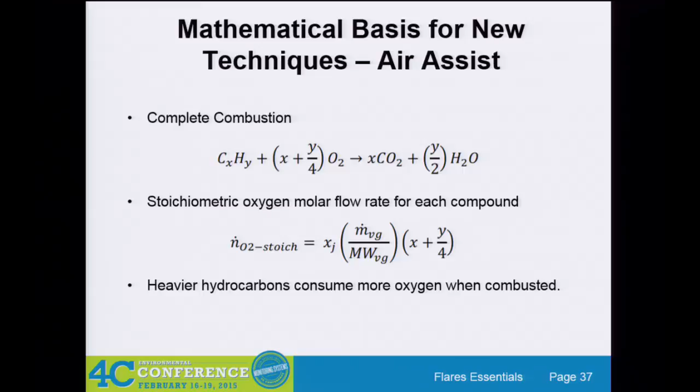So then you're calculating, you had your moles of oxygen, now you have to convert to the mass of oxygen you need. And then you got to go from oxygen to air, because nobody's supplying pure oxygen to their flare. At least I hope not. That's an expensive way to do it. So then you're getting your mass flow rate of air that you need. And then you're just making sure that the amount of air you're supplying as your assist is less than some factor x times the stoichiometric amount of air that you need.

What is the x factor? This is, there's lots of different numbers out there. The OAQPS parameters paper fixed on 7, but then they go and have a consent decree with BP Whiting, who has an air-assisted flare. They got a parameter of 10. We've seen numbers of 6, seen numbers of 5.

There's not, I think this kind of is the point where EPA, I think, understands steam-assisted flares. They've had a bunch of performance tests done on steam-assisted flares, and they're not asking for them anymore. It seems like they've said, okay, we understand them. The EPA's focus has shifted to air-assisted flares, and so they're really going after people who have air-assisted flares. So if you have one and you're in an enforcement situation, don't be surprised if they come to you and say, we'd like you to perform some performance testing on your flare, because basically they want to understand these concepts more. So it's kind of through enforcement, getting you to do some nice little studies for them to let them enforce on a whole bunch of more people.

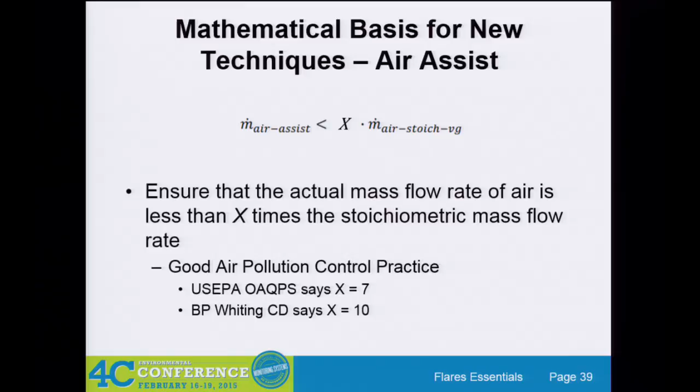So it's not as well known. And when we get to MACT CC, they throw in another wrench. But I'll wait till later to put that out there.

So just to summarize, you need to know the composition. For this technique that's in the consent decrees, you need to know the composition. This is where everybody likes to talk about BTU analyzers, calorimeters. This is where EPA doesn't like to go down that route. So you're finding out that you're calculating the various net heating values, the LFLs, and then determining your limits to make sure that you're above both the combustion zone limit and the vent gas limit. The air-assisted flares, similar. You have to know what's in your composition, because how else would you know how much oxygen to put in? It's compound specific. So you're going to need to know those compositions, calculating how much air you need, and then having a ratio above that in which you need to stay below.

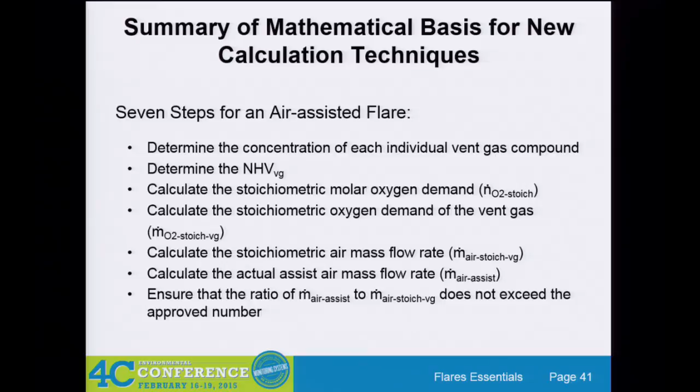So everybody wants one thing to look at and to know they're performing well, that they're doing what they need to do to have good combustion. So through the years, we've had different parameters. We've talked about the exit velocity, how much assist gas, how much net heating value. And basically, there is no one parameter. Even though it looks like net heating value is the strong contender right now, that doesn't mean they're giving up on exit velocity. They're still requiring you to comply with exit velocity, and they're still talking about your steam to vent gas ratios or how much air assist you're putting in. So we're not throwing away anything, we're just adding to it. It's just making the calculations more and more complicated, the monitoring more and more robust.

Okay, questions? I know that's probably the worst one, I'll tell you. Okay. I just like people to know that that was the worst one. And I cannot find my mouse.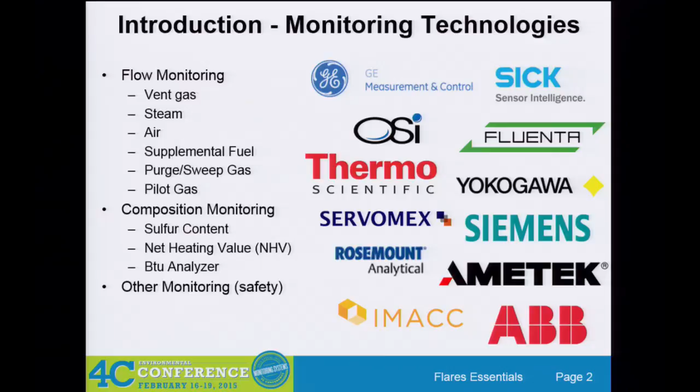Okay, so let's start with flow on your vent gas. What we have up here is your typical GE flow meter. It's the GF868 model, and this is usually what we see at refineries. About, I would say, 90 to 95% of the time, it's usually a GE flow meter.

And the principle it works on is ultrasonic measurement. So it uses ultrasound to measure the vibrations and the disturbance within the flare gas header and measure the flow rate of the vent gas going through. So you have your transducers that measure that disturbance, and then you also have pressure and temperature correctors. They are retractable, and you can maintain them while the flare header is still in operation.

So one of the reasons ultrasonics are so popular when it comes to flares is because as your header gets larger, it's harder to measure that flow, and ultrasonic has proven to be a pretty reliable technology when it comes to larger piping and larger flare headers. Really, the issues you face with the larger flare headers is the low flow condition. It's harder for these transducers to be able to pick up that flow at low flow conditions.

So GE actually recently came out with a new transducer called the T17 transducer. You'll hear T5 and T17 pretty often. T5s are usually what you find at refineries right now, and they're pretty good at high flow conditions, but at low flow conditions, the signal is not strong enough to pick up the low flow. So GE came out with the T17 transducer.

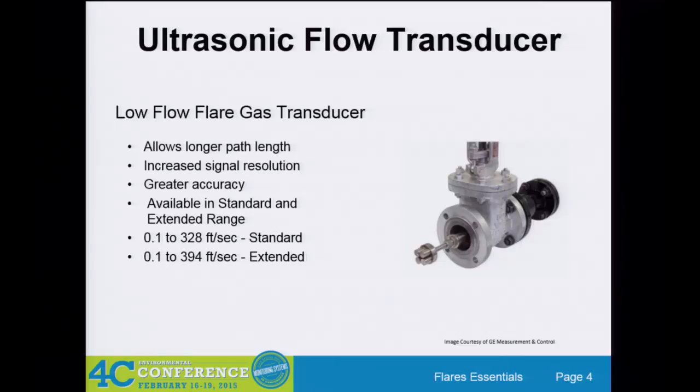Now we'll get into some of the configurations that we find with these flow meters and the transducers.

The first configuration is the bias 90. Basically, you have the two transducers pointed towards each other so that the signal is being read by each transducer, measuring the disturbance between it. You can have it installed on the side, so these two would be a pair and those two would be a pair, or you could do it vertically, where those two are sending a signal across.

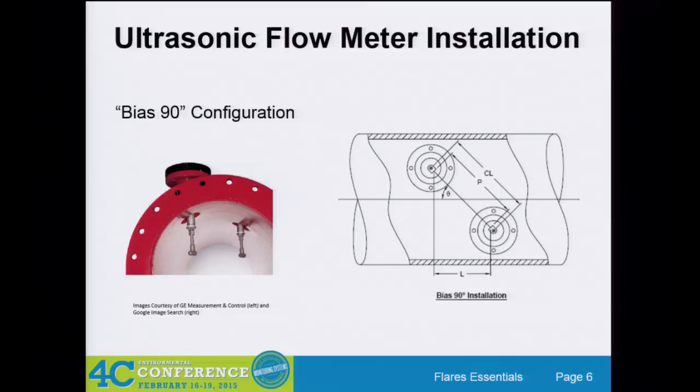This shows you the path length between the two transducers, and the longer the path length, the more accurate your measurement's going to be. That's why you won't find the two T5 transducers lined up like that, because that would mean the path length would be too small. So to maximize that path length, you have them offset from each other.

Another very common configuration is the diagonal 45, or 180. They come into the side of your flare header at an angle of about 45 degrees, and this maximizes your path length. This is a good configuration for low flow conditions, whereas the bias 90 is better at high flow conditions. And of course, with the T5 transducers, if your header is too big, the signal won't be able to read - the two transducers won't be able to pick up the signal from each other - which is where your T17s come into play, and that's the ideal configuration.

With the diagonal 45, it doesn't have to be diametrical in the middle. It can be mid-radius too, so this just illustrates that.

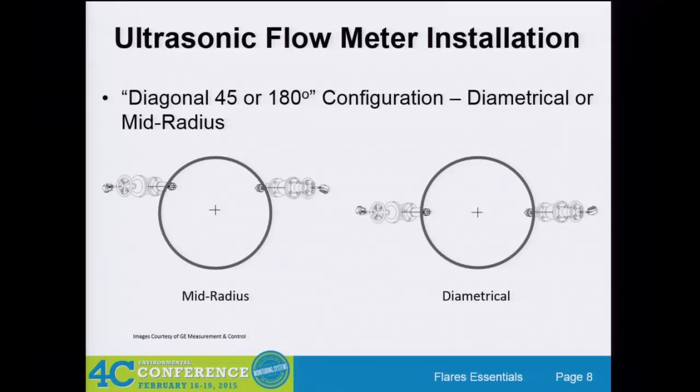Then we get into single versus dual channel flow meters. You can have two sets of transducers, maybe one downstream of the other, and if everything's going fine and you're getting good readings from both sets, that's great. You can average out those readings, or use them as a redundant pair of transducers, minimizing downtime in case you have to perform maintenance on any one of them.

Does it add accuracy? That's the question. We've seen a facility that had a set of transducers on their header and another set downstream, but the two sets were off by an order of magnitude. So we can't really definitely say that it adds accuracy, but if everything's going well, it can be used to average out your readings and prevent monitor downtime.

The dual path. So what we saw so far with the two transducers, or one set of transducers, is the single path. Now we have two sets of transducers, so a total of four, and that's what we call the dual path. This configuration shows that with the T17 transducers, you cannot install them in the bias 90 configuration.

Because of that transducer head that has the four T5s, they're too big to be installed as a bias 90, and you can't point them towards each other. So if you have a T17, it has to be diagonally across like that. We've seen T5s at the bias 90 and T17s across.

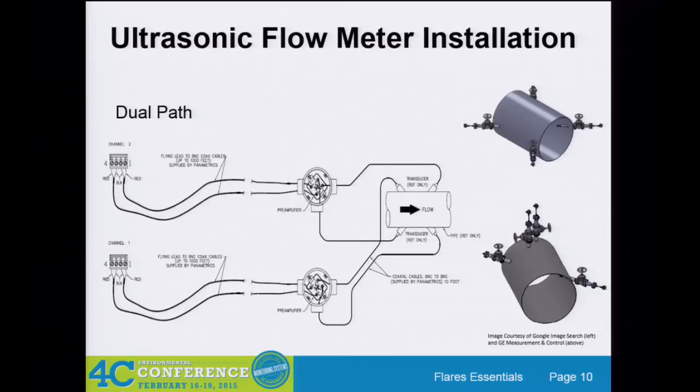Every technology has its issues, and in the case of the ultrasonic flow meters, the issues are reading nitrogen and hydrogen, the diatomics. The GE flow meters, and basically most ultrasonic flow meters, have a problem reading the nitrogen and hydrogen gas that go through your flare header.

GE has provided a correction factor for nitrogen, and that has to be used along with your GC or any other composition analyzer in order to correct for that nitrogen. With the hydrogen, basically with the ultrasound, the density of the gas going through your flare header matters, and since the density of hydrogen is so low, it's harder to get that signal to detect it. That's why GE came out with the T17s also, because it provides better accuracy with hydrogen.

This table shows the different models of flow meters that we've seen out there. You have the SICK flow meter, this is the OSI optical flow meter - they have a booth out in the exhibition area so you can check them out there - and then you have the GE ultrasonic flow meters as well.

What we want to point out from this table primarily is the required downstream distance and the required upstream distance as recommended by the manufacturer.

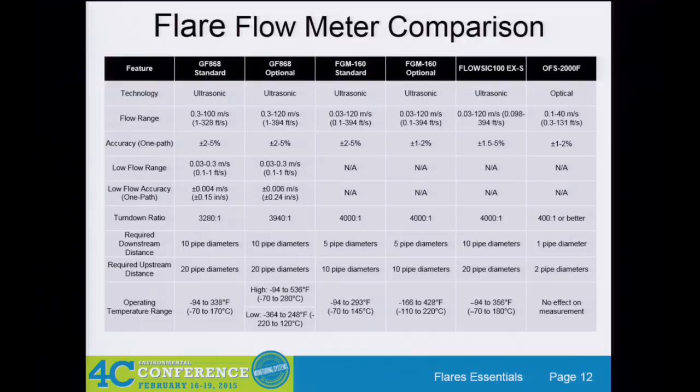Now, what's important to notice here is that the optical flow meter has a very low requirement of 1 pipe diameter downstream and 2 pipe diameters upstream. The downside of the optical flow meters is that it only gives you velocity, so it won't give you mass flow rate, which is okay for JA and certain other requirements, but with MACT CC, it would become a problem. You'd have to use it with a composition analyzer to determine your mass flow rate.

Okay, so now we'll get into flow meter accuracy. A lot of those flow meters have a flow range that goes pretty low, but most of them stop at around 0.1. The manufacturers say we can go down to 0.1, but any lower than that could be a problem.

And NSPS-JA and MACT CC actually do not allow for a very high inaccuracy percentage. The 20% is usually what you see in consent decrees, but JA and MACT CC only allow about 5% inaccuracy, and that can sometimes be a problem. So that's what we're trying to illustrate through this table.

We looked at flow rates going up from 200 to 1600, and then we looked at the different sizes of your flare headers. These numbers here are the velocity in feet per second of your vent gas. As you can see, even at low flow rates, you get out of that 0.1 range very soon. In a 1.5 foot header, you're out of it at 200 CFM. And as your header gets bigger, even at a high flow rate like 600 cubic feet per minute, per the manufacturer, that flow meter is probably not going to pick up your flow.

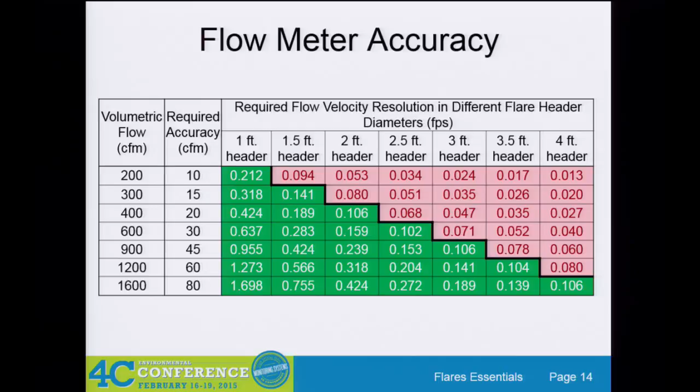That's based on the 5% inaccuracy allowance that JA and MACT CC allow you. But if you were to take the 20% allowance that the consent decrees allow, that gives you a much higher range of acceptance. So you're still within that 0.1, but for a 2-foot header, you can go as low as 200 CFM, and it can still be detected by your flow meter.

So that allowance becomes important, and I think, Herman, correct me if I'm wrong, I don't know what's happening in MACT CC, but are they trying to get that in there, or?

Right, so that's the main concern.

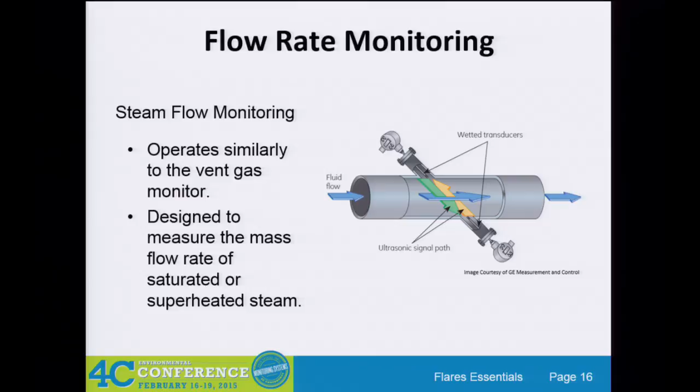Okay, we'll move on from vent gas now onto steam flow monitoring. With your steam flow monitoring, you don't have any requirements as such. The only requirements for accuracy that we've seen have been in the consent decrees. It doesn't require you to use any type of flow meter or any type of technology. As long as you can meet those accuracy requirements, you should be good.

With the steam flow meters, of course, they tend to get very hot. So we do recommend that if you're going to install a steam flow meter on your steam line, that you have a bypass valve around your flow meter so that if at all you need to pull that out for maintenance, you can use the bypass to provide that minimum amount of steam as recommended by your flare tip manufacturer, and then allow the steam flow meter to cool down. It'll take some time to cool down, but having that bypass valve becomes important to allow it to do that.

Okay, moving into the supplemental fuel gas and purge and your pilot gas. With the supplemental fuel gas, again, there's no technology or accuracy requirements that we've seen in the consent decrees, so you can usually control that with a restriction orifice.

Just like your purge and sweep gas, you can use a restriction orifice or a back pressure regulator. If you have a set flow rate that you want, the flare tip manufacturers recommend a certain amount of purge gas to be sent, so you can set that using that regulator or orifice. Pilot gases are usually set at a constant rate to ensure the presence of the pilot, so again, a restriction orifice works pretty well for that.

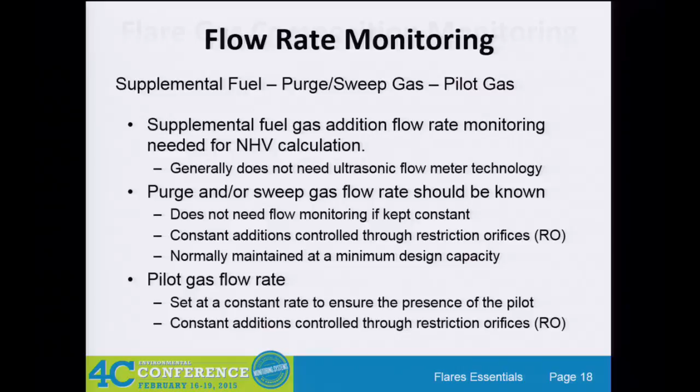Okay, so that was flow, and now we'll move into flare gas composition monitoring.

The main technologies we've seen have been GCs, gas chromatography, and it's a good technology, widely used in industry, so we know it works. The early CDs actually specified using GCs. The only downside with GCs is the sample time. A quick sample can take about 7 to 8 minutes, and a slow one could go up to 10 to 15 minutes, so you're not getting that instantaneous measurement of what's going to your flare. That becomes an issue if you're trying to control your BTU contents at the flare tip or your steam to vent gas ratio, so that sampling time becomes a problem.

With your Fourier transform infrared spectroscopy, it works great at detecting the constituents going to the flare, but the downside is it doesn't measure diatomics, so your nitrogen and hydrogen won't get measured by FTIR.

Mass spec, again, great technology to speciate. The downside for mass spec is you need a bunch of cal gases, so you need many different calibration gas cylinders on site, which can then become expensive and inconvenient.

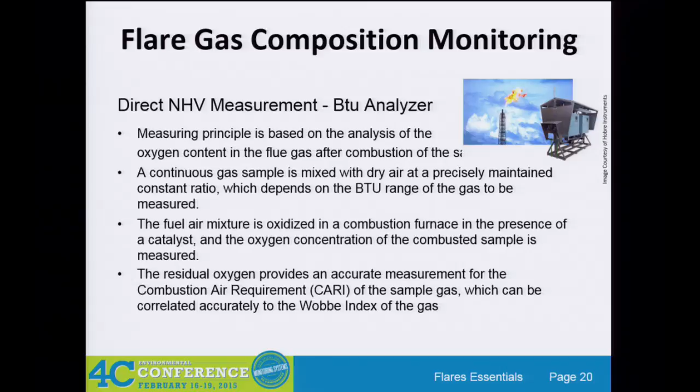NSPS JA has an H2S requirement of 162 ppm on a 3-hour rolling average. Some of these monitors are specifically made for JA compliance. For example, your tunable diode laser is a laser tuned to detect a gas at a certain frequency, so in this case it would be H2S. So all it can measure is H2S, but it does a good job at doing that.

Staying on the JA track, you have the total reduced sulfur requirement. JA says you cannot emit, or you would trigger RCA, at 500 pounds of sulfur dioxide, and it allows you to measure your total reduced sulfur to meet that requirement. That's where Thermo Scientific has a device called the SOLA II to measure total sulfur. They actually have a stall here also at 4C, so you guys can go check that out also.

On these devices, you have to perform your daily calibrations, your CGA and RATA. Again, you use your cal gases for that.

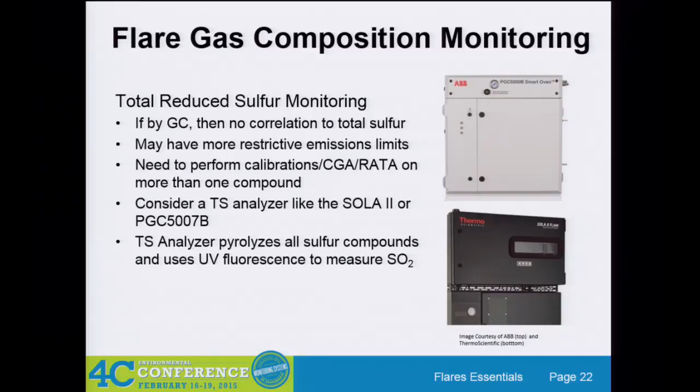Then we get to some of the other monitoring points on the flare system. On your liquid seal, you check your water level. For pilot presence, you have the thermocouples that detect the temperature at the pilot, and you can use IR or acoustic sensors for that as well.

Pressure sensors become important if you have a flare gas recovery unit. How do you stage your compressors? Do you have multiple recovery compressors? It's important to measure that pressure so that you can create your set points to recover that flare gas.

You can also have acoustic monitoring on your high H2S valves. In case you have certain PSVs on a process with high H2S, in order to make sure you're not leaking high H2S gas to your flare, which would push you over that 162 limit, you can use acoustic monitors to make sure they're seated properly, or every time they lift, they come back and they're not leaking anymore.

So that was a quick rundown through all the monitoring options you have when it comes to flares. We can always get into further detail, but as we try to keep moving along, I think it's about lunchtime now, so next we'll be doing control strategies back at 1 o'clock.